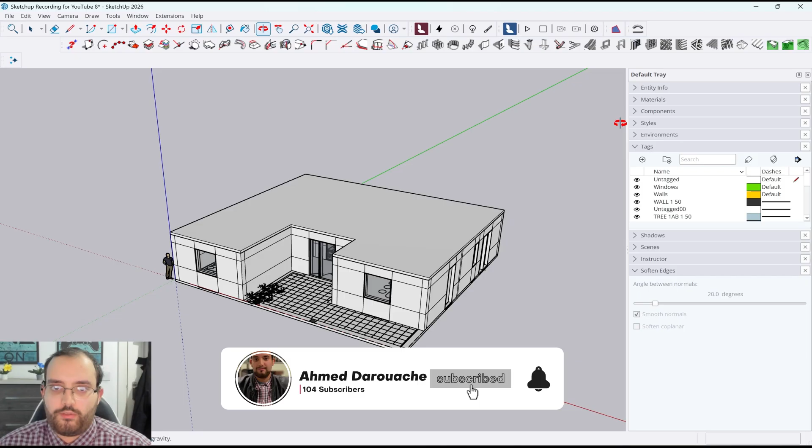Alright guys, welcome to my SketchUp tutorial again. Now I'm going to be explaining how to export geometry in a clean way. You need to clean your SketchUp files first before exporting to 3ds Max, which I'll show in future videos. There are a couple of things you need to do, so I'll be showing you 6 steps or options.

First, what you need to do is go to Purge Unused. I would go to Window, Model Info, Statistics, Purge Unused. Because I've already done that, I don't need to do it again. What this does is make the geometry nice and clean, and it decreases the loading times, which helps you be productive and also prevents problems when importing and exporting to 3ds Max. This is why it's important to clean your file. So that's the first step, purge unused.

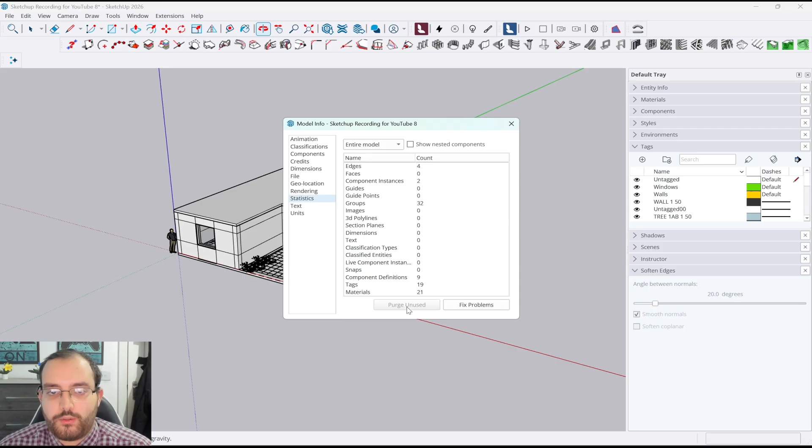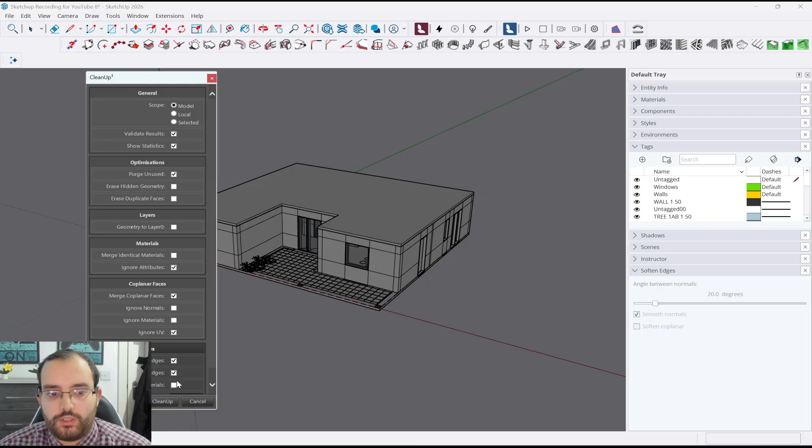The second one is using the cleanup, or cube, commands. Using Extension, Cleanup, the small 3 cubes icon, and go to Clean. You need that to clean your files before you export to 3ds Max. I'm not going to go through everything so I don't waste your time, but you can leave it as is, or select anything, it's fine. I'm just going to go clean up.

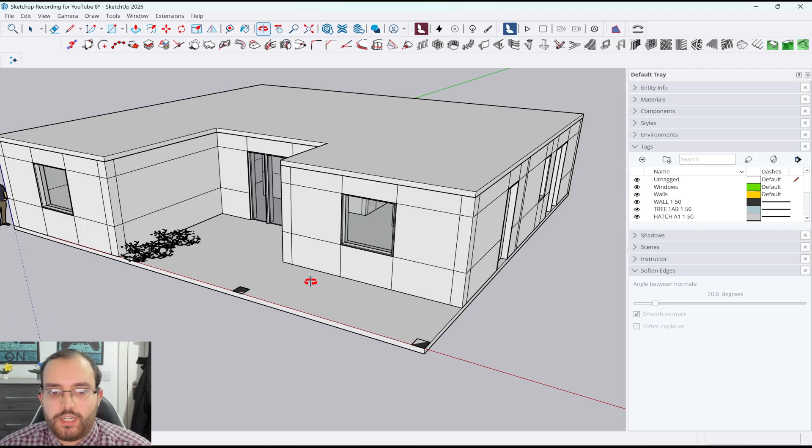So then it's cleaned it for me, which is good. Now we've got the results of the validity check, and everything is fixed, so that's amazing. Now you can see that some of the edges are gone, just to make it more clean, so that's fine. Now that's for number 2.

Number 3 would be reverse faces. I don't know if you've seen it in my previous videos on reverse faces, but I'm going to show you how this works.

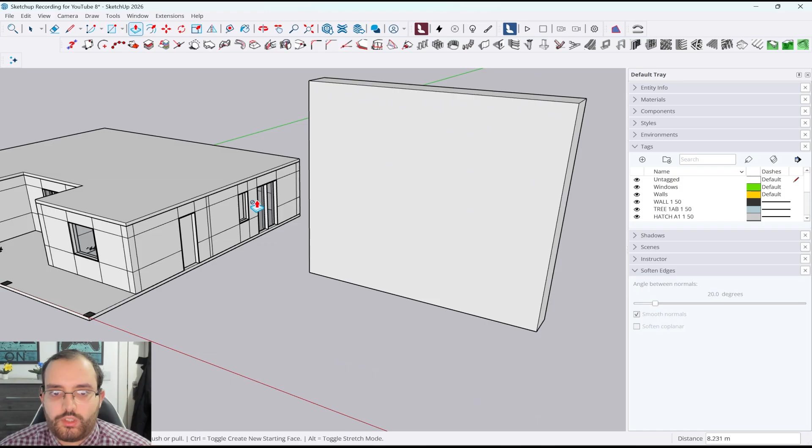Let's say I've got a rectangle like this, a 3D rectangular shape. I right click, and then I select reverse faces. Now you may see that one part is white, let's say one part is blue, and everything is white.

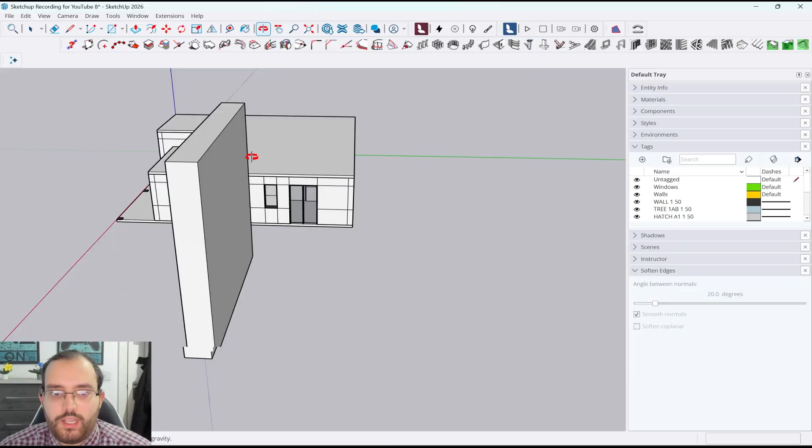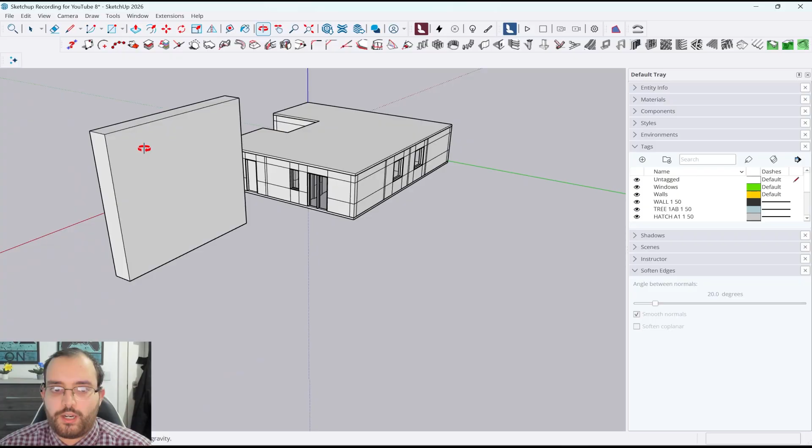Now here's the most important thing you have to understand. If you want to export to 3ds Max, you're always, even if you're doing 3D printing or anything, supposed to change it to white. Why? You want to change it to white because you want to close the shape, and blue does not close the shape. If you don't close the shape, it can lead to errors in your 3D model, and that is why it is extremely important to leave every outside of the shape white. Do not leave it blue.

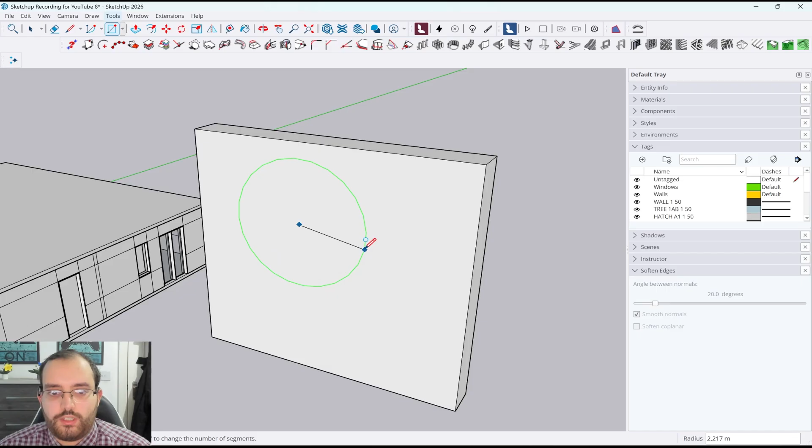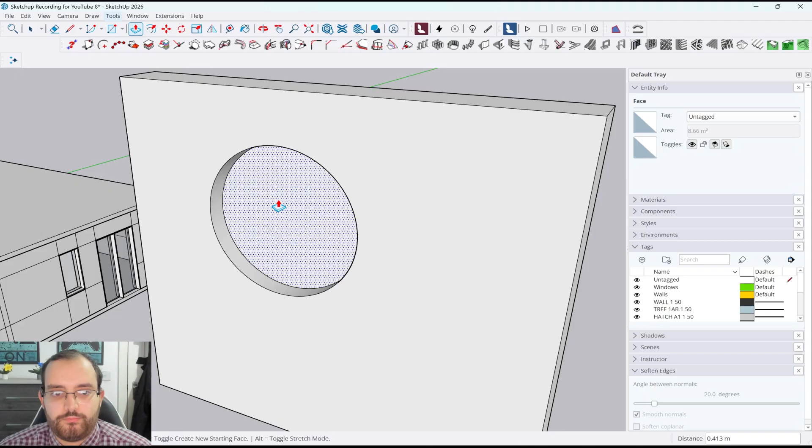And it's extremely important, let me show even the inside bit, I'm going to show you what I mean. Let's say I've got this circle. Let me make it a nice circle, so I'll go to Entity Info and make it 100 sides. Okay, reverse faces.

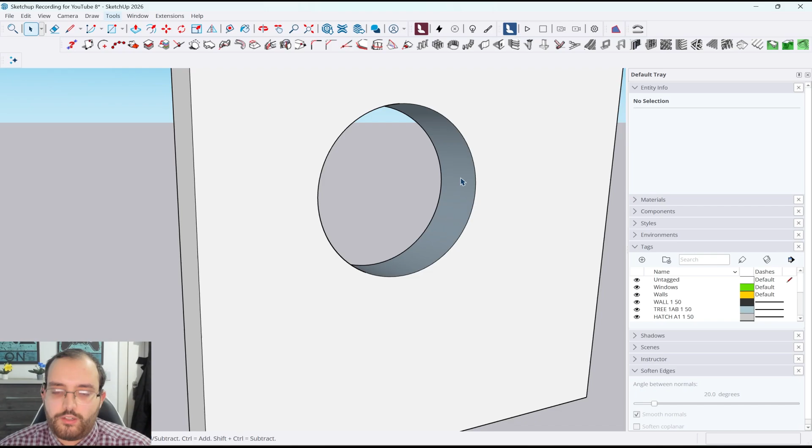This is a good example. You can see that this inside is blue. But if you leave it like that and export it to 3ds Max, 3ds Max will think that that is a gap and not a fully closed shape. I hope that makes sense, I might not say it properly, but the shape is not fully closed yet. That is why you always have to right click and reverse faces.

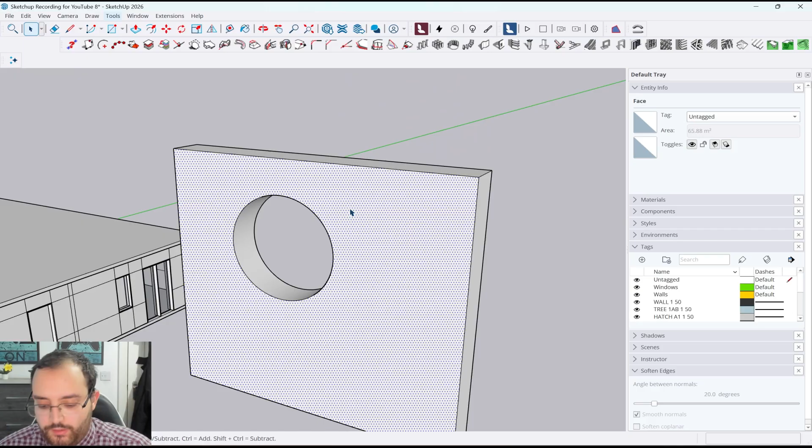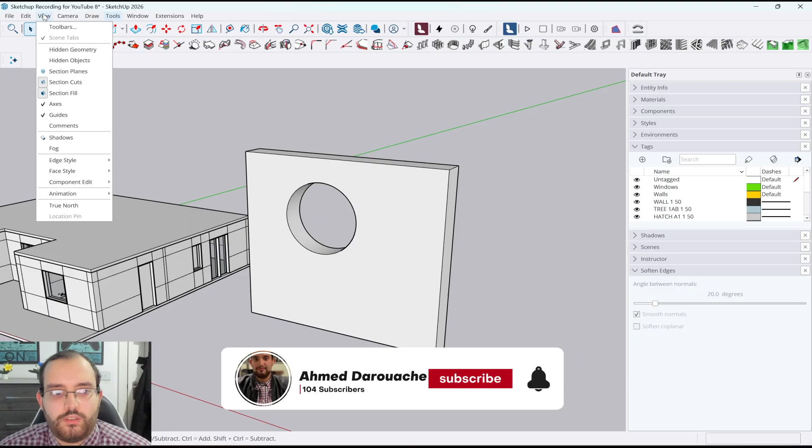You can also check the shapes if you go to View, Face Style, Monochrome. This is to reverse faces and make it clearer for you. But I like to keep it original.

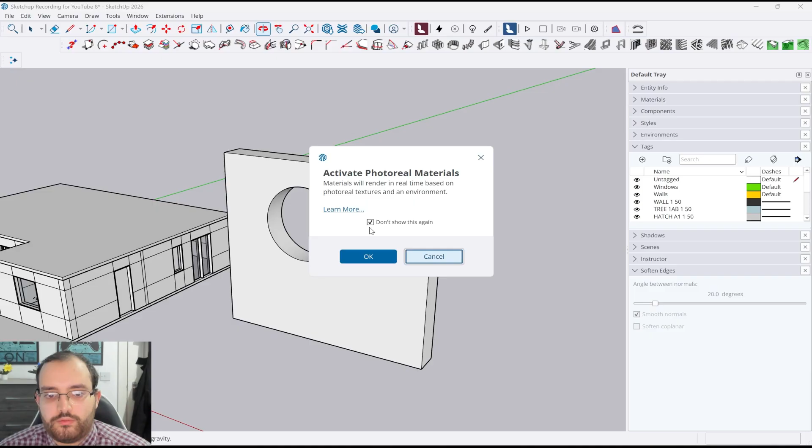Oops, mistake. So, View... okay, let's go to, let's say, Monochrome, just like that. I don't know why SketchUp is just like this, so I might have to fix this. Just give me a second.

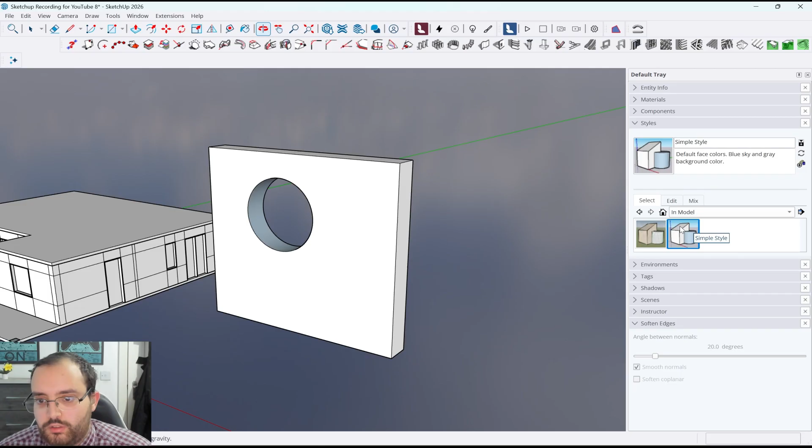Okay, I will need to fix this after, but you know what I mean, so please ignore the background, I'm just doing the model.

Now, the fourth thing is hidden geometry. So I can go to View, Hidden Geometry. Obviously I do not have any hidden geometry or hidden objects, and it's very important to see where you made a mistake or not.

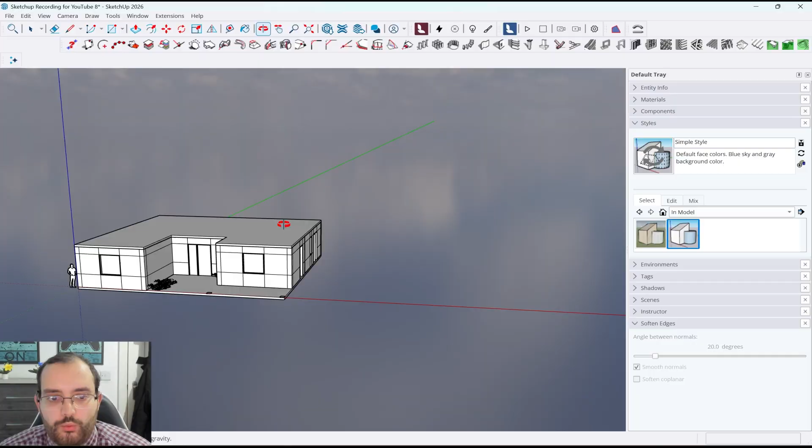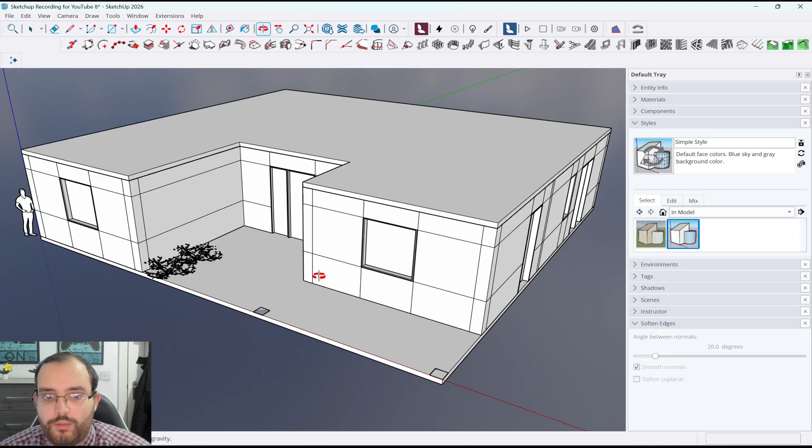Now, you can go to Zoom Extents, and you can see if the model is there. For example, let's say you work on this model and it might be over here - if we have two models, clicking Zoom Extents will show everything based on where you put the model. But I only have one model, so that's perfect, I don't need to do anything else. That's for number four.

Number 5, group and components. I have explained in my previous video on group and components - that is why you have to make groups and components, and it's extremely important that you.

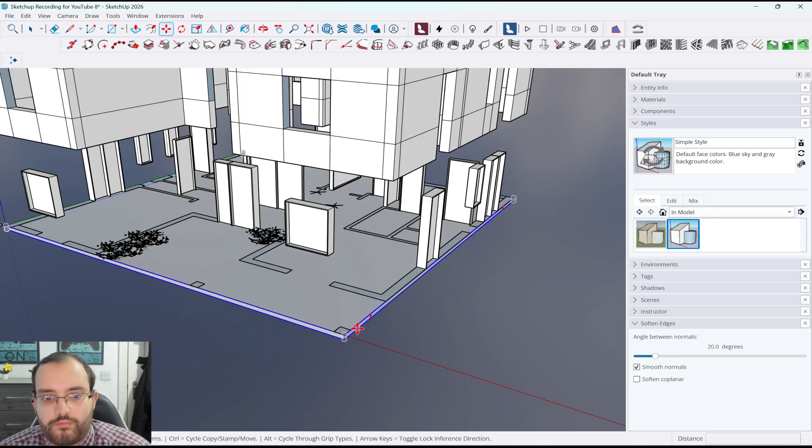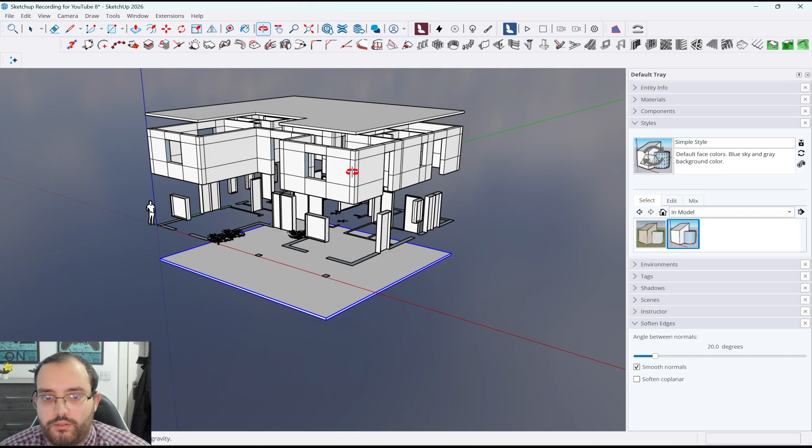I'm just showing you like this, guys. It's very important that you make groups and components for easier geometry and for easier export. You can also make exploded drawings - if you are an architecture student or architect, you can make exploded drawings like this. This is why you must do groups and components. I hope this makes sense.

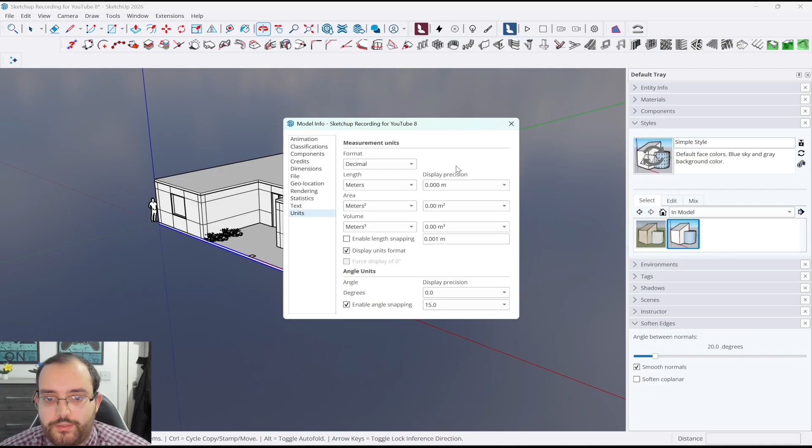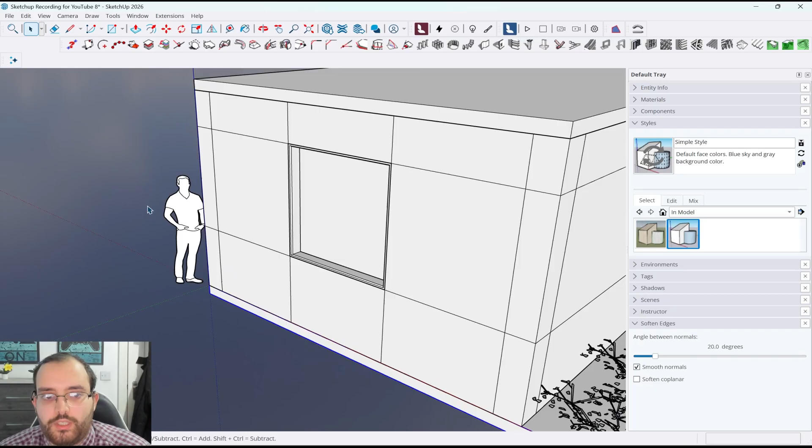And obviously, if I draw something, you can see the meters. Now you can check by measuring, but the rule of thumb is that I like to use a person for the foundation of my model, because this makes my model accurate and I don't need to do any scaling when it comes to 3ds Max.

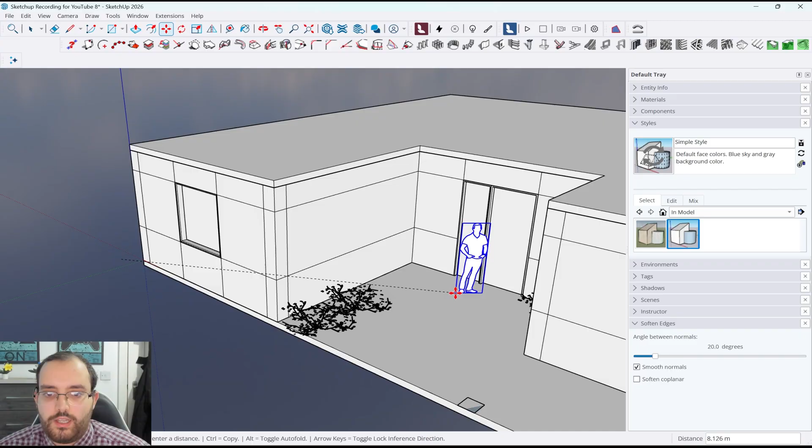For example, I can check, okay, the door is like this - is the height enough? Yes, the height is enough, the windows are good. Let's say if I'm going to - so having a person in your SketchUp model is extremely useful.

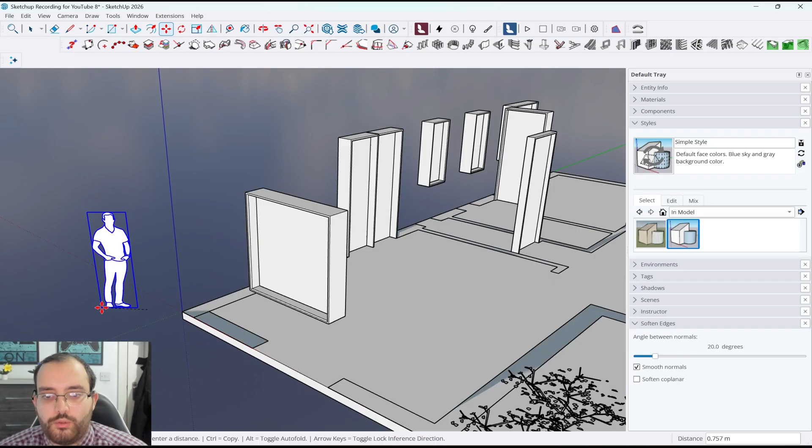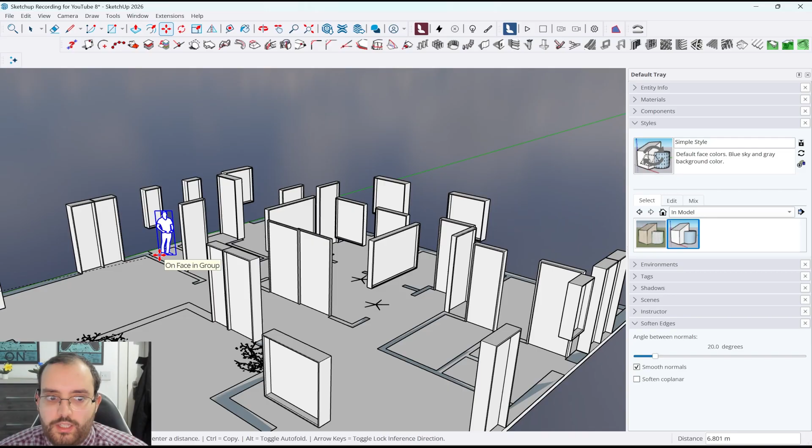So let's say I have the person over here, I can check the door - that's good, the width is good. I don't need to change anything else because of the floor plan. But I downloaded the floor plans just for illustration purposes for you guys, and it's important to scale your floor plans first before you model it, otherwise you'd waste time without scaling. So that means I've done everything correctly - that's the scaling part.

So, number one, purge unused. Number two, use Cleanup Cube or CleanUp3 extension - you can download it for free in Extension Warehouse. Number three would be reverse faces - make sure that's all white, no blue bit, all white on the outside.

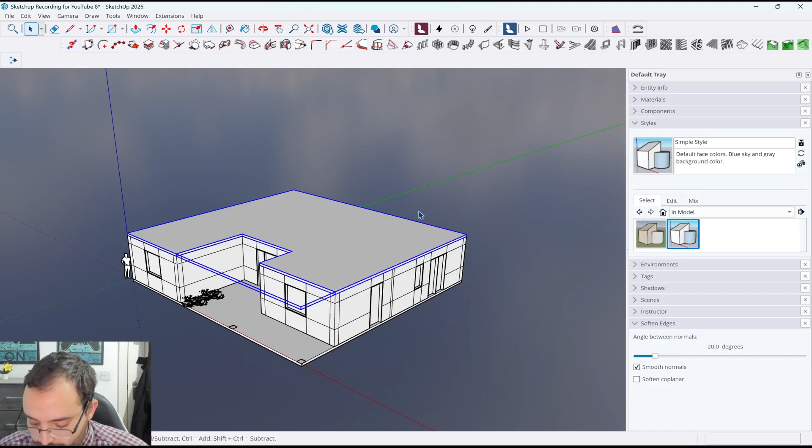Number four would be remove hidden object and geometry - so I'd go to View, this one, and obviously I don't have any, I can just leave it. Number five would be group and component - I've explained how to use group and component on this exact same project in my previous video, so please have a look at that. And number six would be check scales and units, and I recommend that you use the person before you even model anything, so that it helps you with scaling.

I've also talked about scaling and more groups and models on my channel, so please have a look at that. I hope that makes sense, so yeah, I hope everything makes sense. If you do get confused, please look again and again, watch this video until you get used to it. And obviously, in the future, we'll be slowly going on to 3ds Max.